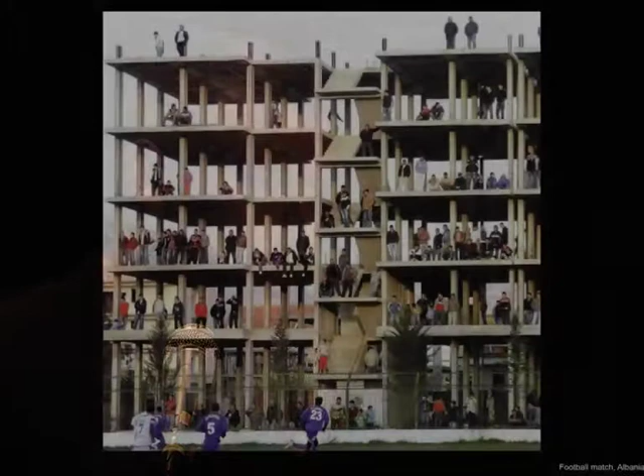Another misunderstanding, in a way, or misuse: a football field somewhere in Albania. And next to the football field there's a construction site, and all of a sudden it's used as a stand. Without any security issues. But all of a sudden, if you venture into this situation, you get the most fantastic view on the play. And we liked this image so much that it became the cover image of the book, the Double or Nothing book.

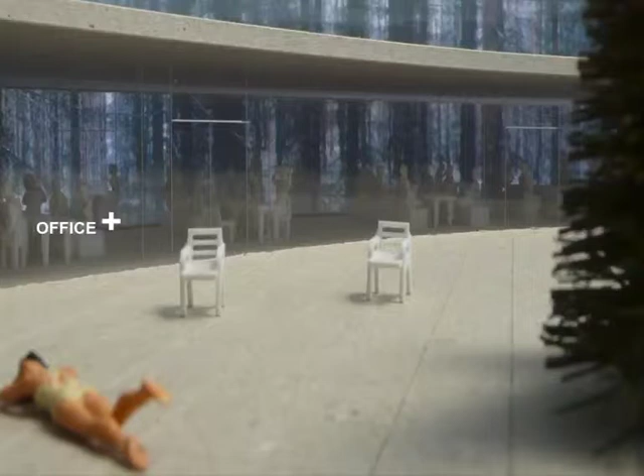So this Double or Nothing will be, of course, the theme of the lecture, but I'm not going to repeat each time what is now double or nothing. It's up to you also to decide or to figure out. But I'm going to try to show you some projects in a random order where this sensitivity or this interest is actually an underlying score.

First, we start with sustainability, because we have to talk about sustainability, so let's do it immediately, then we're in a way also rid of it. Office Plus is a study. No, I mean, I'm kidding, okay? The sustainability is important. Before I get there. Office Plus is a climate-sensitive office. So it's not a sustainable office, but it's a climate-sensitive office.

So there's a difference. This was a study which was granted to us about 4 years ago by the Rijksbouwmeester in Holland. And in Holland they use the GreenCalc method to calculate sustainability. The index starts at 100, and as it becomes more and more sustainable, 180 is the actual standard these days. So it's a bit like with a fridge. But the question of the Rijksbouwmeester was actually, what if we would reach 350, which is like 3.5 times the standard? So what if in 10 or 15 years' time we would like to try to reach 350? This is beyond passive, in a way.

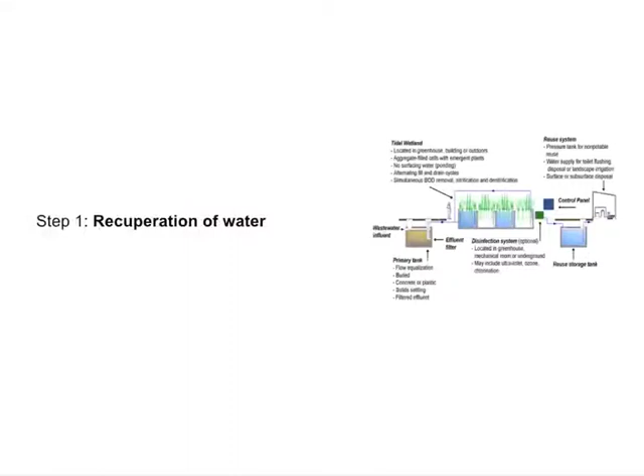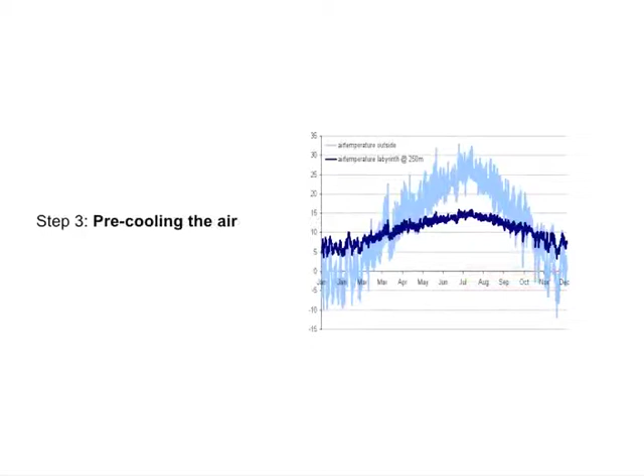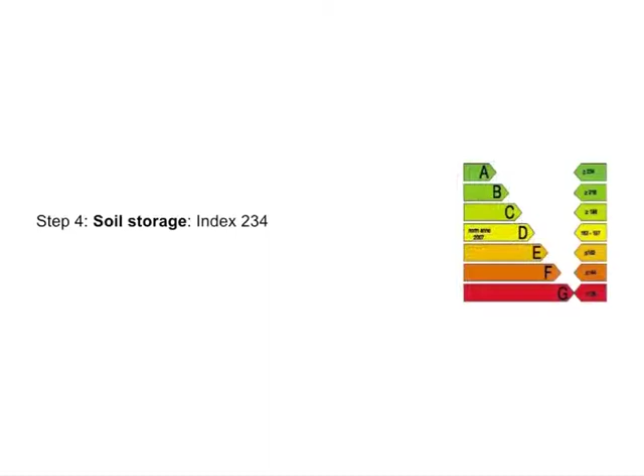So we start with 100. We do some recuperation of water, go to 120. Timber construction, go to 144. Pre-cooling of air, sending air through a labyrinth, 216. And soil storage, which gives us a 234 index. But still this 350 jump, in a way, we're not there yet. So all these technical methods, all these technical aids, they're not sufficient to reach this beyond standard.

And if we look at the office today, the standard office, and this is an office from the 50s, but it's in a way still the office today, you have a kind of constant temperature, 22 degrees, for instance. Although outside, the temperature changes. So we could imagine that also inside the condition changes according to the outside. This was the starting point.

A thermos, with multiple layers. And we devised an office building in layers, a bit like an onion peel. So the middle space is the clima-office, actually the usual office as we know it. It's insulated and conditioned. And then there is a space which is quite huge. It's insulated but not conditioned, because it feeds its energy from the surrounding ring. And then the outside ring, which we call the greenhouse, is not insulated, not conditioned.

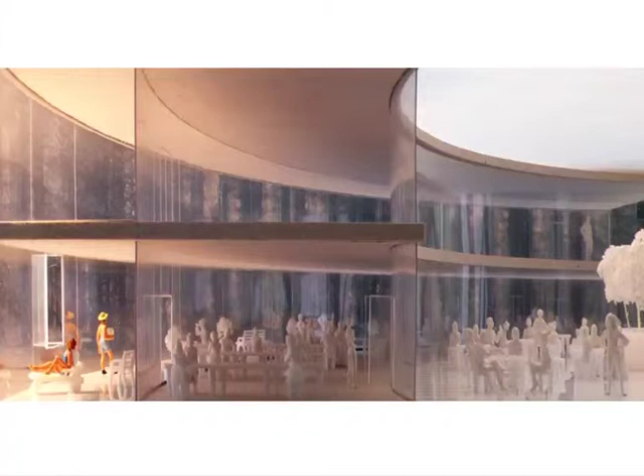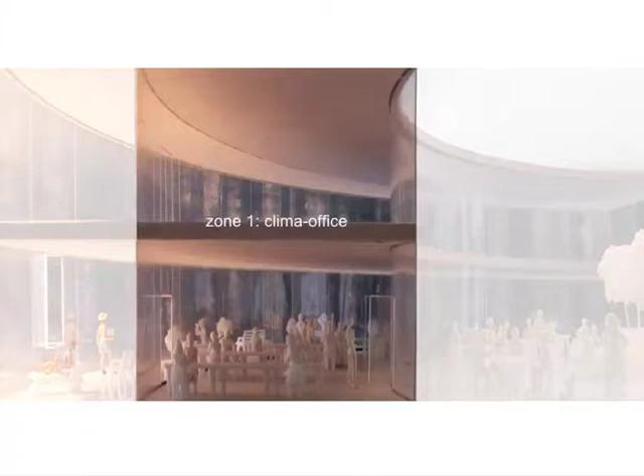And if we would cut through such a building, and at this stage in the testing it was circular, it doesn't have to be circular of course, we have this first middle zone, the clima-office, which is normal temperature, normal situation. Then the overflow space, the middle space. The overflow space is double high to compensate for the fact that it lies deeper, in order to attract more daylight, but also to be more spacious, to have more oxygen.

And of course the greenhouse, which is the thinnest layer but still inhabitable, is, like I said, non-conditioned and non-insulated. Which means that according to the figures 4 years ago, 1/3 of the surface is actively climatized, generating a climate-dependent building that can be fully utilized the whole year through, or well, 80% of the year, without any loss of comfort, which is a lot.

So that means that we still have to think about the 20%, which is not covered yet. So in a normal situation, everybody is everywhere. And at extreme temperatures, all of a sudden people group in this middle ring, which means that thinking about sustainability is really also thinking about, in a way, allowing for a certain level of discomfort, meaning that you have to change your habits.

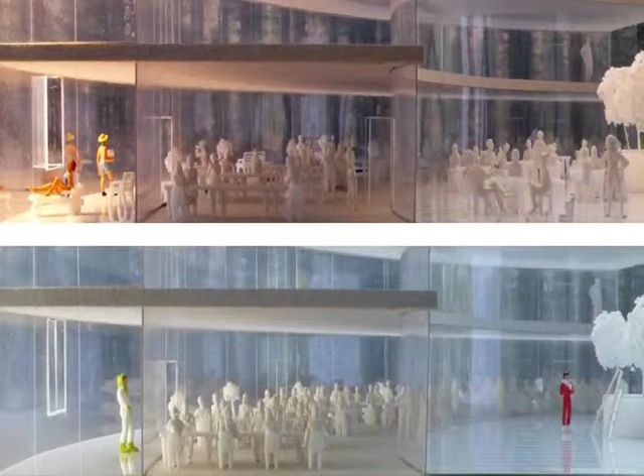So it's not a one-to-one relationship as what we know now, but if we really want to go sustainable, it means that during winter, for instance, this climate zone in the middle is densely populated. But it also can have its advantages. So summer, fully utilized; winter, kind of compressed office building. Which means that all of the time you have to negotiate your own position towards space, but also towards the people you work with.

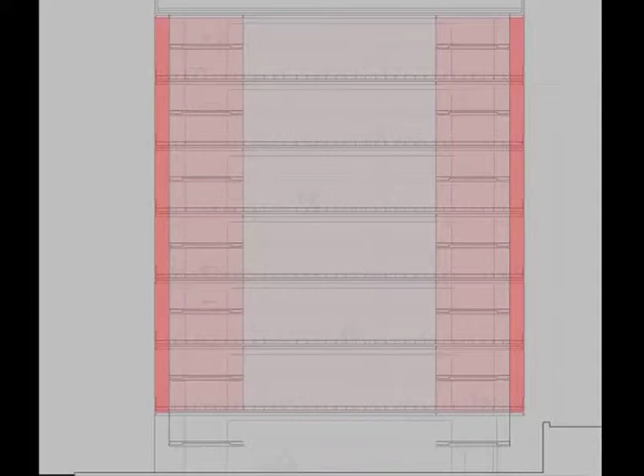At the moment it's a very abstract diagram, but it's the same principle. So the greenhouse, the climate office, and the overflow space. We're developing this concept for an office building somewhere in France, hoping that it can be built, because we really think that this is, in a way, the way to go ahead. So to create difference in spaces. As you can see here, the overflow space is double high. And the normal offices are, in a way, normal, but quite narrow, and the greenhouse as a kind of cover.

This is one possibility, of course, to think about sustainability. But like I said, it means changing your habits. It means being confronted with this tree that you actually have to negotiate. You have to think. And the same thing, in a way, goes for our office. This is the office in Molenbeek. Also, we're located in a spot in the city where we constantly have to think, we have to negotiate, we have to define our position. And the same thing goes for the people who work at the office. You see some people here trying to also negotiate their way through Brussels public space.

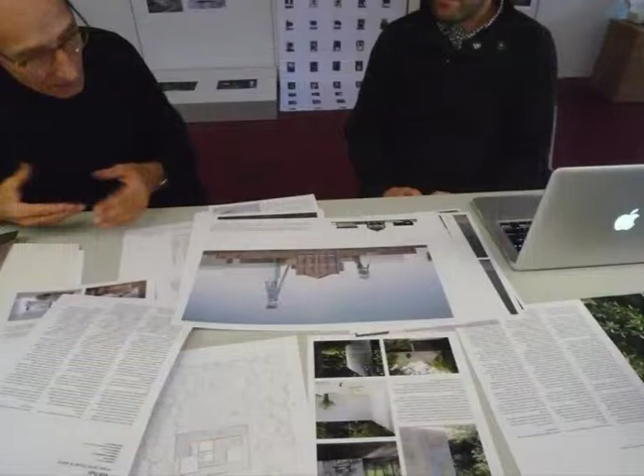And coming to the issue of exhibiting architecture, I think it's one of the most difficult things to do, and I'm pretty much sure that exhibiting architecture is impossible. So you have to find other ways. So maybe we're not exhibiting architecture upstairs, we're doing something else.

And during these talks, I remember the first time we presented to Dominique, I think like 50 projects, 5-0. And gradually, each time we had to prove or argue why a project would be sufficient enough or intelligent enough to make it into the exhibition. I think we ended up with 27 projects, 28 projects.

I like these pictures a lot. It's like, aha, yeah, this, and then still again doubting. And so we went on and on and on, but I think we made it, and I think the exhibition upstairs really is, for us anyway, a powerful tool to renegotiate our position towards what we're trying to do.

The place itself, although it's hot inside here, we're actually located in a fantastic building. It's Palais des Beaux-Arts, and for us it was the only place we actually wanted to exhibit in. And maybe this sounds arrogant, but it's true, because in Belgium anyway, I think it's the only place which is open enough, which is urban enough to allow for architectural exhibition in a proper,

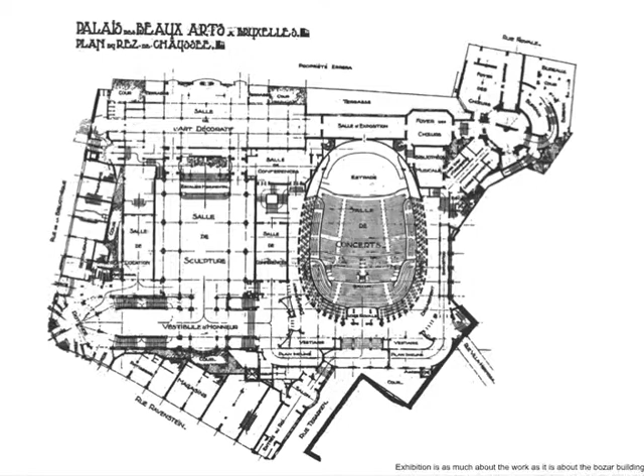And also when you see the plan by Horta, and I'm still doubting whether it's a genius plan or a non-genius plan, but I think it's a genius plan. I assume that it's a genius plan. This whole building, we actually wanted to make also a statement about being present in this building in Brussels with the work we're trying to do.

And you probably know how architecture is exhibited in the Palais des Beaux-Arts. And from the very first moment with Bozar, with Ivan, we entered into a kind of discussion to see what could be the best location to not present only the work, but also present the Palais des Beaux-Arts, or to represent the Palais des Beaux-Arts.

And we discarded the usual parcours, and we picked the Foyer des Choeurs and the salle de conseil. But we also picked one extra space on the other side of the Horta hall, in order to also be able to use the Horta hall as part of, well, not the exhibition, but what we wanted to state.

The Horta hall itself is a kind of impossible room with dimensions which are in a way larger than life. And again, this is a space where this suspension of disbelief could very well work, or should very well work. And these three spaces, this one is in a way a new space, it's part of the white box. These three spaces actually give on to the Horta hall, and they're designed now as cul-de-sac.

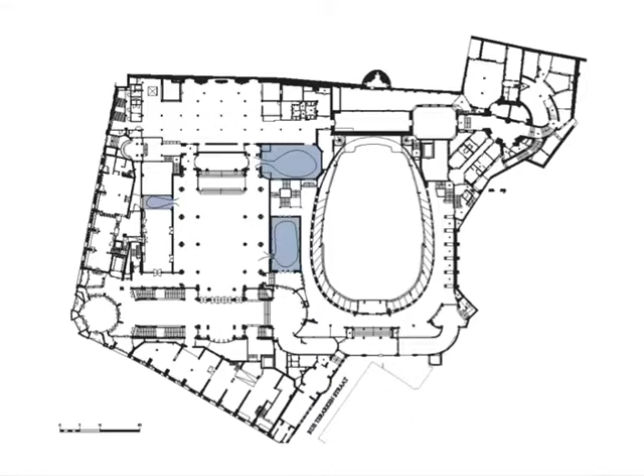So where you go in, you go out. So there is no way of, you always come back to the Horta hall. In the sense that this becomes then not only the central point of the building, but also the central point of the exhibition. And in a way it's maybe strange to do so, because if you see the plan, it's a very transparent plan.

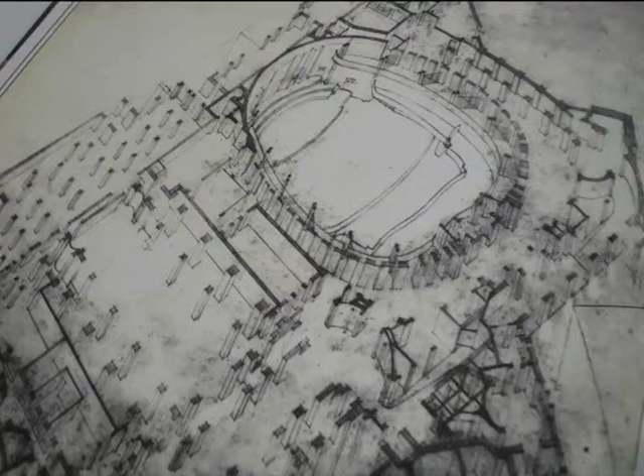In a way, what we're trying to do is to enhance the realization that you're actually in this kind of building. That it's not self-evident that you go from space to space, but that each time you come back and you look back, or you look for another space and you come back and you look back for another space.

This one, the Salle de Conseil, which you probably know, is again double high, but it's one of the most difficult spaces to exhibit in. And bearing in mind the title of Double or Nothing, we're going for a nothing now. We actually had a plan in mind, a concept in mind, because we wanted to open up the spaces. So this was an existing entrance, this is an existing but quite new entrance, and here there is no entrance, you have to go through here.

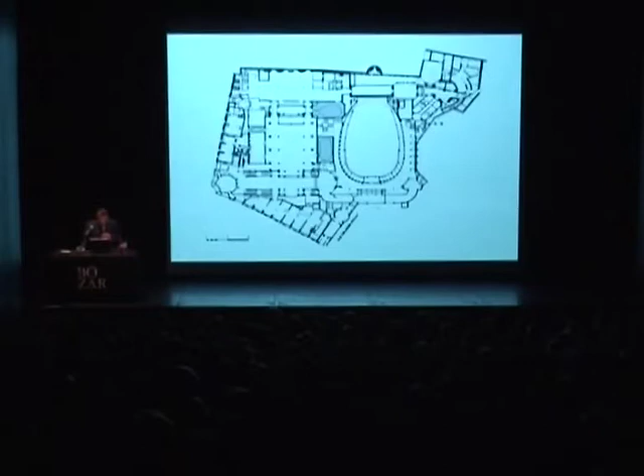And we actually talked to Beaux-Arts and said, actually, we want to use also part of the budget to maybe be part of the renovation. So the plinth is missing, so we will add a black marble plinth, but also a black marble door, which could give access to the Salle de Conseil in a very direct way. This didn't happen. We were so close, but Heritage said no. And we went back and they said no again. And then we said, okay, we don't have time anymore.

But maybe in the future, I know Paul Dujardin is a very big fan of the concept. So maybe in the future this will be realized, because we think it could be very worthwhile, because the Salle de Conseil is the only space around the Horta Hall which is not immediately accessible from the Horta Hall. So this was a nothing, but we tried to deal with the nothing, so the 3 spaces.

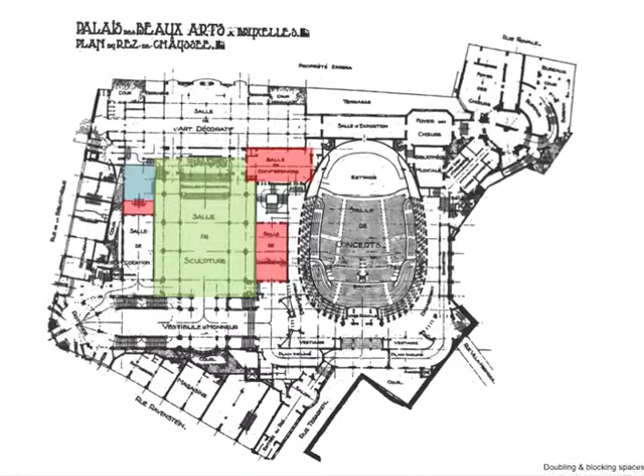But we were also interested in doubling the spaces or to block the spaces so that all of a sudden double readings could appear. And for instance, this small space, and I invite you later on to go into this small space, is actually also giving on to the Cinematheque. And this is the genius of this building. Everything is connected with everything. So in a way you go mad in this building because there is no order apparent. But it's fantastic to use it for the exhibition.

So this small space, in a way, is doubled, even tripled, by the fact that it's giving on to one of the foyers of the Cinematheque. So this is the first space, dealing with one project, one house, which I show later on. But again, in a way, almost showing the project in this space is almost secondary to the fact that this space is used in such a way, this kind of mirroring way.

The second space is the Horta Hall. So in a way, we're dealing with 4 mini exhibitions in one. And this was still a simulation when we thought opening was going to be there, but you have to discard this. In the Horta Hall, we're presenting 2 major works, also in a major way, on the scale of the Horta Hall, but not simply showing architecture, but trying to acknowledge the fact that, like I said earlier on, exhibiting architecture in a way is impossible. So how can you show this impossibility? How can you show the fact that, in a way, it's not real? Showing architecture is not real.

And we asked for these 2 projects. On the left, the tower, TID Tower in Tirana, Albania. On the right, C-Mine, Genk, refurbishment of an old industrial site into a cultural infrastructure. We asked Filip Dujardin to make these impossible representations of these 2 projects.

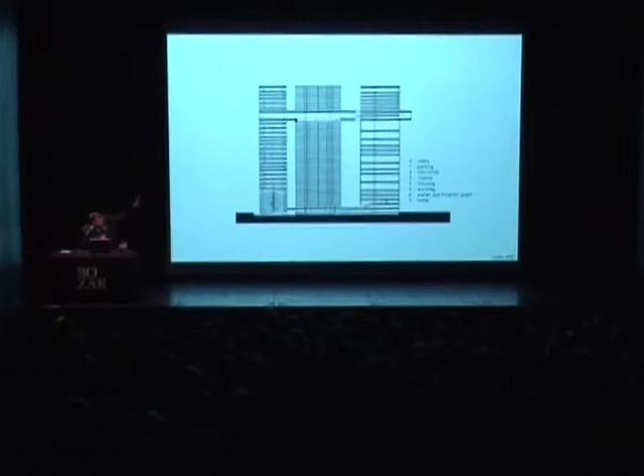And in a way, as a reaction to this, and also on the occasion of our first book back then, we developed this project. In a way, it's a flimsy project. It's a statement project. But it's about high-rise, and to think about high-rise in the sense that high-rise can also be something complex. Three high-rises connected with a new ground floor level at 150 meters high. On the right, a water purification center, because it was connected to the canal. It's actually standing in the canal. This is Quartier Nord, the canal.

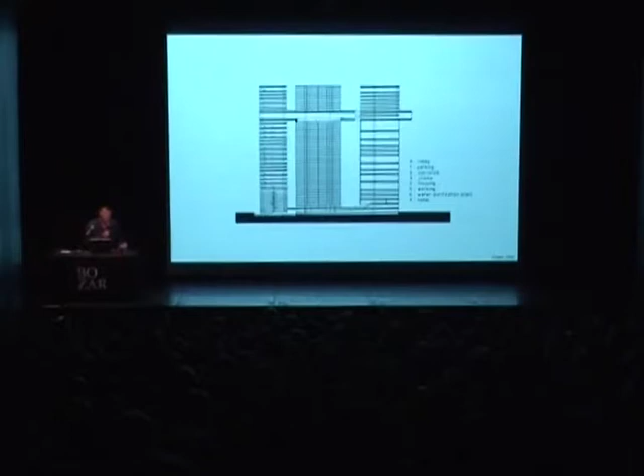Housing and offices, and on this level we thought it would be ideal for all the population services of Brussels. So each time there's a birth, each time there's a death, each time there's a marriage, you could have this kind of fantastic moment engaging with the city. And on top of this platform, you had a small skyscraper, Brussels size, which was a hotel.

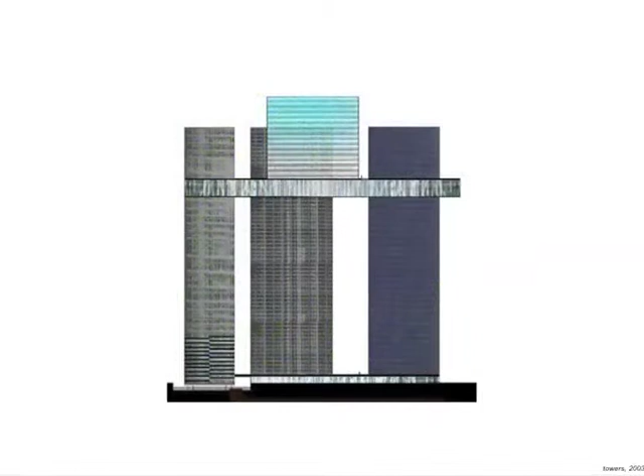I think 6 years later, we're facing this, more or less on the same spot. And let's say, although this is, like I said, a flimsy project, a statement project, not meant to be built, this is meant to be built, and we could imagine, if we think about the Sao Paulo image, where high-rise and low density together form a complexity of their own, that maybe here there are still some chances to be taken or to be developed.

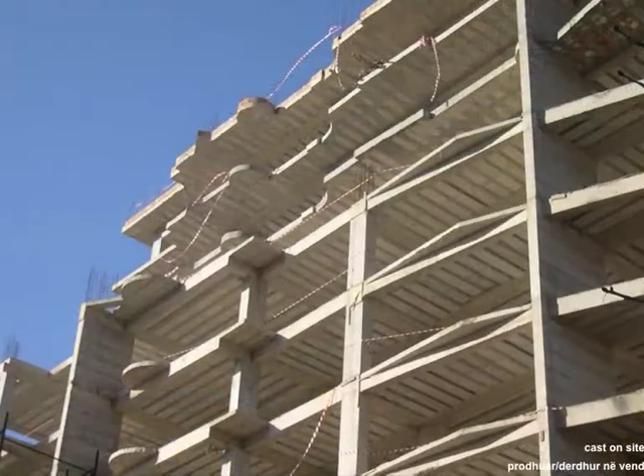And then swiftly going on to the tower we're making in Tirana, which is near completion. Tirana is this. It's a kind of big sprawl center. And all this is more or less illegally built. But Tirana at the same time has enormous qualities. It's very compact organization. It has beautiful climate, beautiful light because of the dust. There's a lot of dust in the air. Lots of Mercedes. But also low-tech building methods.

So we arrived in Tirana in a way by accident. But we were immediately confronted by the fact that what we thought we knew about building, it was worth nothing. So in a way we had to reprogram completely, 100%, and start from scratch, learn in a way how to build in Tirana, but also learn how to deal with the context.

And this is what I mentioned before, Rama, the mayor, who's been painting buildings, often illegal buildings. And it's a kind of very quick method of showing, and I mean, you can like this or you can dislike this, in a way it doesn't matter. It's not about beautiful or ugly.

But it's a very quick method of showing the people from Tirana, who come, let's say, from communism, pyramid games in the 90s, which made the whole economy collapse. So their sense of society is completely gone. And this, in a way, is a method, not the method, but a method to make them feel that they're actually part of a bigger whole, part of a society. So, and this is Rama, former artist, now mayor.

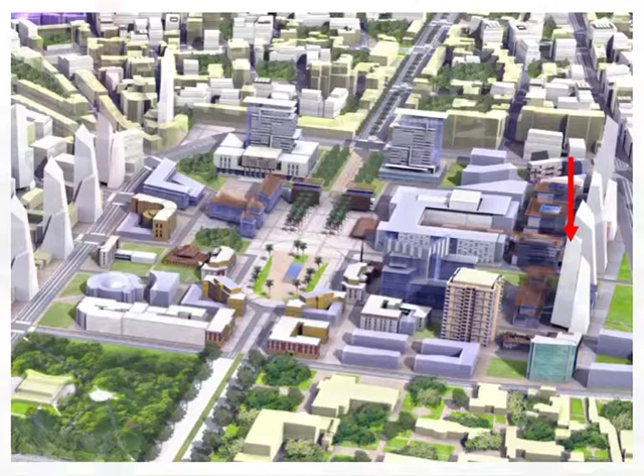And Rama has this crazy plan, to try to deal with the Tirana context in a contemporary way. This is an image of the center of Tirana, with old remnants of communism, amongst others. And the tower we're building at the moment is quite near to the center, so this is Skanderbeg Square. And it's part of a master plan. In a way, there were 10 towers planned, but they will never be built. We're dealing with this tower on this location.

On the location is the monument for the founder of the city of Tirana, Süleyman Pasha. And already there it starts, so the clash of scales, the impossibility of building something new against or next to something more than holy. And the tower project in itself, I'm not going to explain the whole project because it would take me too long. But in a way, it's not about the tower, it's not about the architecture, but it's about the light and how to capture the light.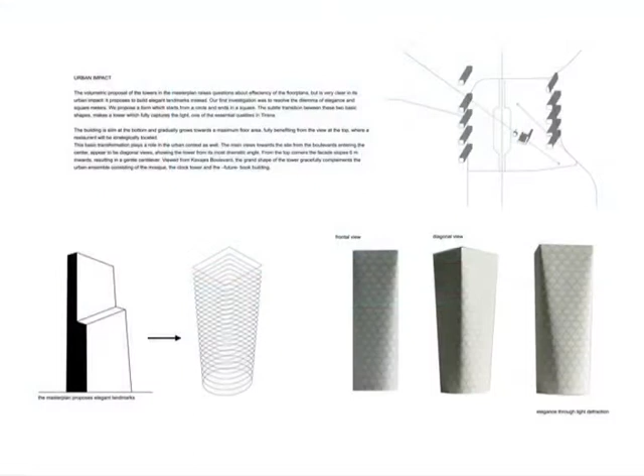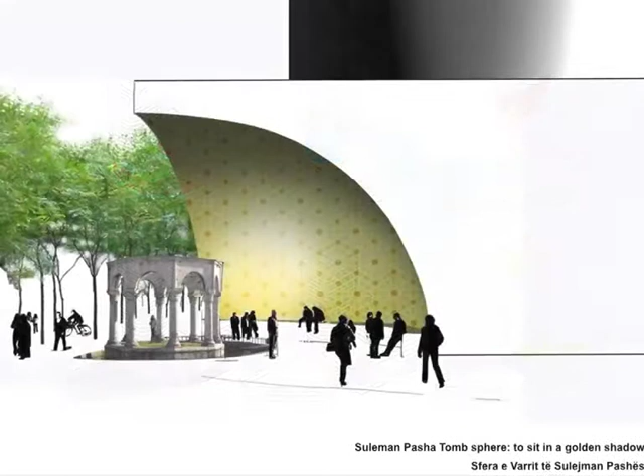And this is the first model we made. It goes from an ellipse to a rectangle. And this was what interested us, how the whole shape could capture the light. So superposition of all the floors. This is the lowest floor, upper floor. And you get this kind of vase-like volume, which is programmed with different functions, from commercial to housing, or it could be housing, it will be offices and some public functions. This is how we try to deal with the Süleyman Pasha impasse.

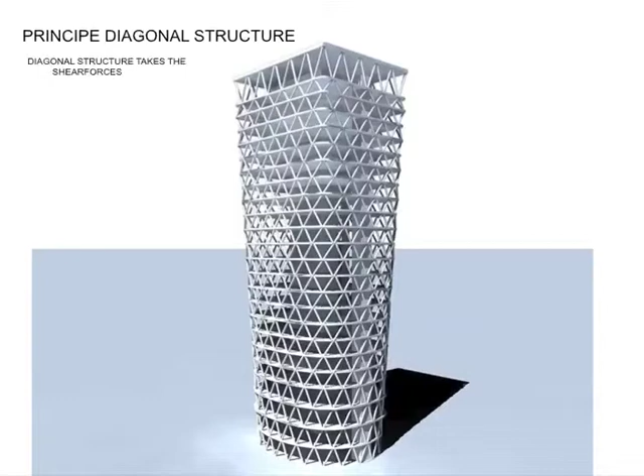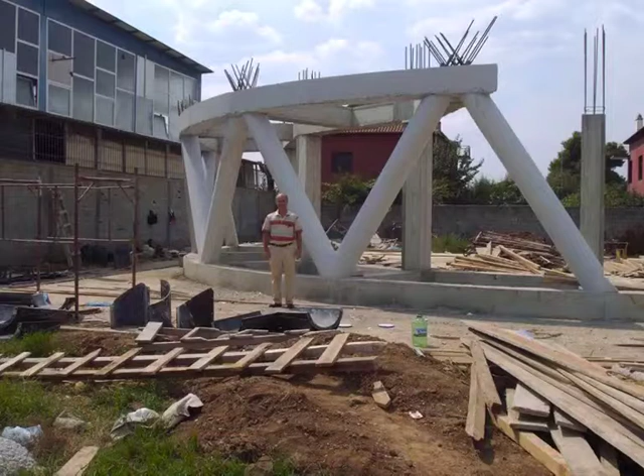And this was during the competition, because it was a competition, this was the proposal we made. We thought we had to be very inventive. So we made up some kind of structure because it's earthquake territory. We also made up this kind of skin, kind of moucharabia skin. And we were, in a way, making the project very, very complex without knowing it. Because, again, we didn't know the context of Tirana yet.

After winning the competition, we got an engineer and also a client who was completely convinced about the whole structure. So he said, well, let's build it. Let's make a mock-up to actually show that they could build it. But you have to know that each of these beams have different lengths, the whole tower through. So in a way, it could be built, but it would cost so much money. It wouldn't be clever to do so.

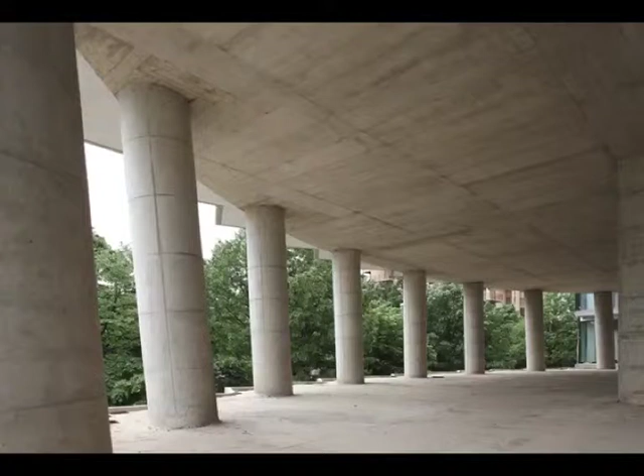So we managed to convince the client of going for a more normal way of building, inclined columns. And also trying to reconsider what we proposed during the competition, to reconsider the skin, also make the skin, let's say, as stupid as possible, so that it could be built with low-tech means.

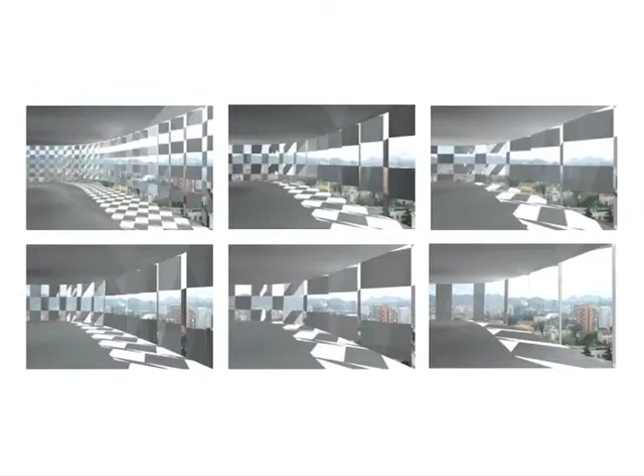So we tested one-to-one different variations, because the one thing we knew was that we wanted to go for a ratio of 50-50, so 50 open, 50 closed, because it's Mediterranean climate. Also, what you have to know is that it's extremely dirty. There's a lot of dust, so you can't make a glass building over there. So it should be a building which can get dirty.

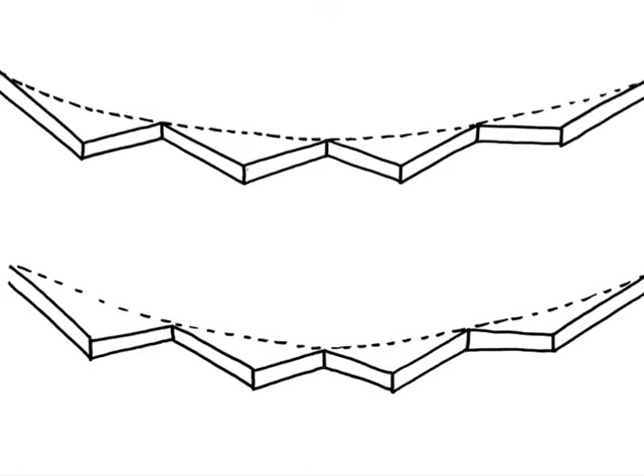And I'm now making a shortcut of 2 or 3 years, we arrived at this principle where each floor is actually surrounded by 44 triangles, and the inclination of these triangles shifts as you go along. So at the bottom it's very sharp, and as you go along they become more and more flat, which means that with one panel, one size, we can clad the whole tower in such a way.

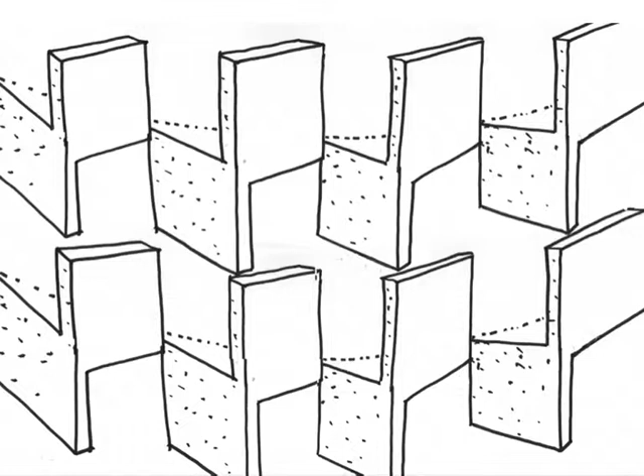And let's say the astuce is this, the fact that they don't touch, because this super ellipse shape is completely three-dimensional. So if you would think of the Gherkin, for instance, in London, we didn't have these kinds of budgets to cover the facade in such a way, so we had to find ways, making use of the fact that the eye, in a way, is lazy and reads this as a kind of continuous skin. But at the same time, it was also about dealing with the scale of the city and dealing with the scale of the building.

So using these panels, which are quite high, they could be sensed as very high balconies. It's a bit, again, like with the tree, so it's in a way too big to be normal. But it opens up the view. By blocking it, it opens up the view. So it engages you with the landscape. And again, we still have this potential of filtering the light, capturing the light, making mock-ups. They like making mock-ups.

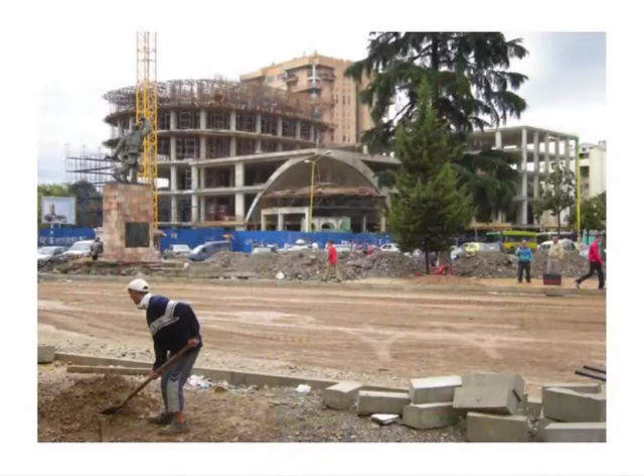And also this is a very important image, because, like I said, you have to forget everything you think you know. This building, for instance, is the first building in Albania where there are construction site meetings. It's the first building where we comply with international standards. But that means also renegotiating your ways of dealing with the construction site. So Johan Anrys, the partner who is almost always on site, devised a system where he projects on a whiteboard, because the contractors can't fully read the plans. So we have a problem: they have to execute the plans, but are not really able.

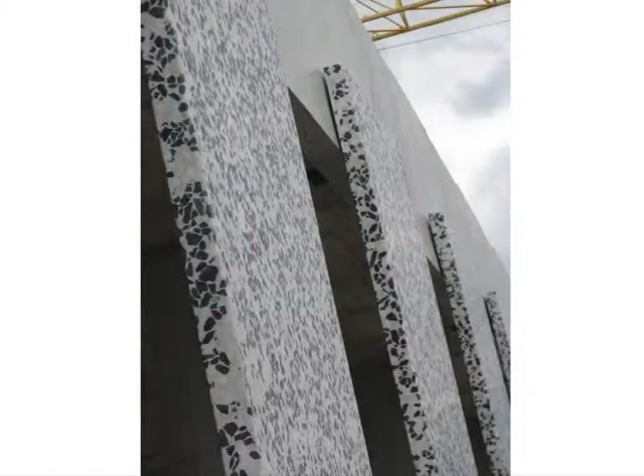So we draw at the same time with the contractors on this plan, and by drawing, we actually also know that they understand, and we are quite sure that we can go ahead, even though it's still a very low-tech way of building, but one that they can manage.

So this whole building, in a way, is about filtering views, filtering light, and again, being present in the city, but also giving a very clear signal to the city that in a way it's like painting the facades, but it's a three-dimensional way of giving the same kind of signal. As you can see here on this picture, this issue of scale, I think it works quite well. So it's not too big, and at the same time it challenges the scale the city has today.

Also, it's not only a tower, of course, it's a kind of a base, and the way it stands on the ground floor with a small galleria, it becomes a small part of the city, ready to be enlarged, ready to be continued. And this is the view from Skanderbeg Square, where you can see Skanderbeg, the clock tower, the mosque, and the TID tower. And although they're from different times, almost from different beliefs, in some strange way they start to make up a comprehensive whole, a comprehensive way of dealing with the city.

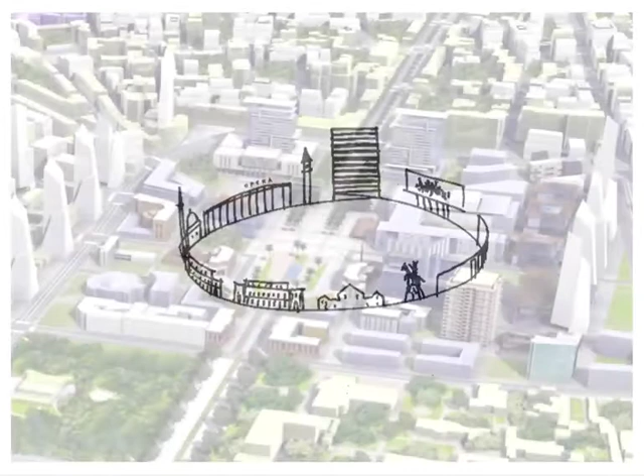This is Tirana. So the idea is actually in this sprawl to make, almost top-down in a way, a space, an oxygenous space from this. But also a space which can actually deal with the fact that around this current square there are buildings, there are monuments which are in a way a kind of testimony of Tirana's culture, of its history, and it's not always pretty, it's not always beautiful, but nevertheless making a space which could deal with this.

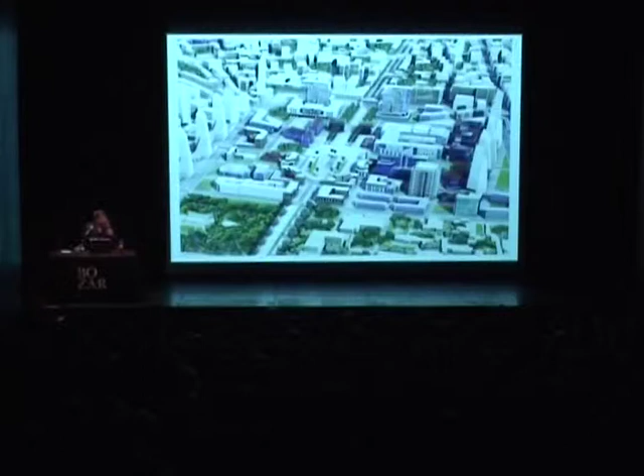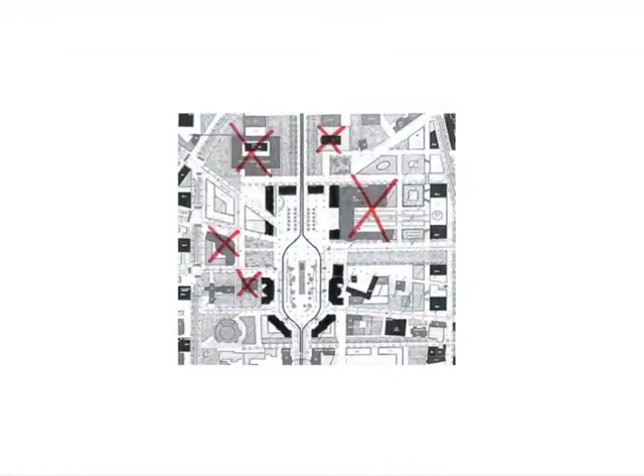The former master plan, which was developed by Architecture Studio, actually foresaw a new square by building new small buildings. So in a way, eradicating all these communist buildings, hiding them. And we wanted to do, in a way, the complete opposite. So making a square where every piece of history was actually on the square. So there was no way of escaping.

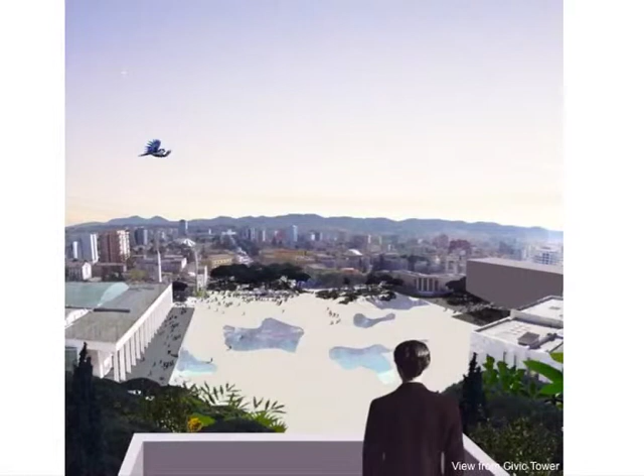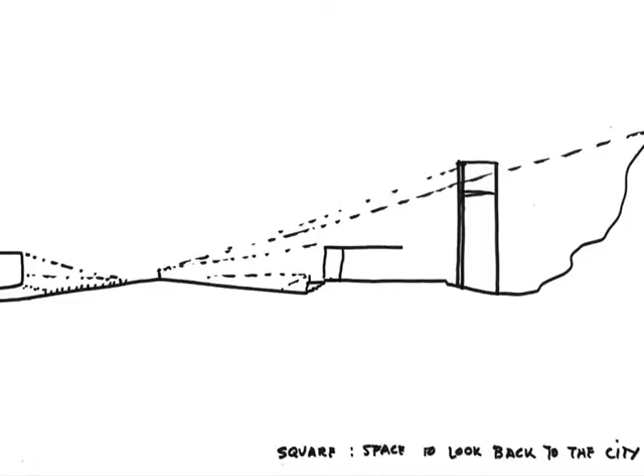The square itself is a slight pyramid. Slight pyramid, not for the sake of a pyramid, but in order to, in a way, break the square. But also, all these huge monuments have these kind of stairs. So all of a sudden, people in the middle of the square are looking above these pedestals. These pedestals, which back then were actually meant to frighten people to actually enter the building. Around the square, there will be also kind of a green ring buffering the square.

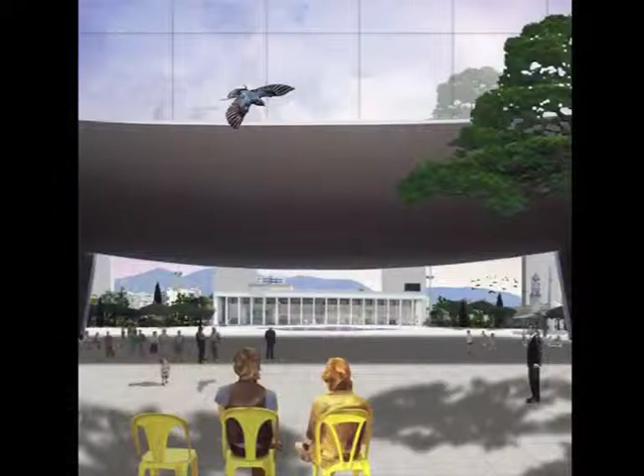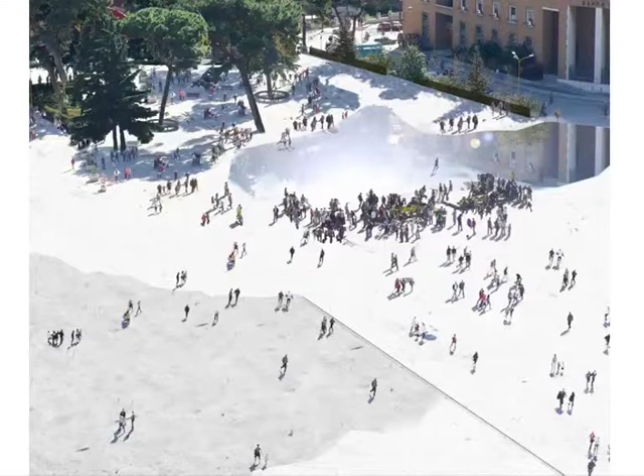And also on the square, and this is not for the sake of happiness, there will be water features. Water features, of course, in order to install on the square moments of doubt, moments of interference, where all of a sudden water starts to arise. So you have to, again, each time renegotiate your position. This is the underground of the square with all the tubes for the water.

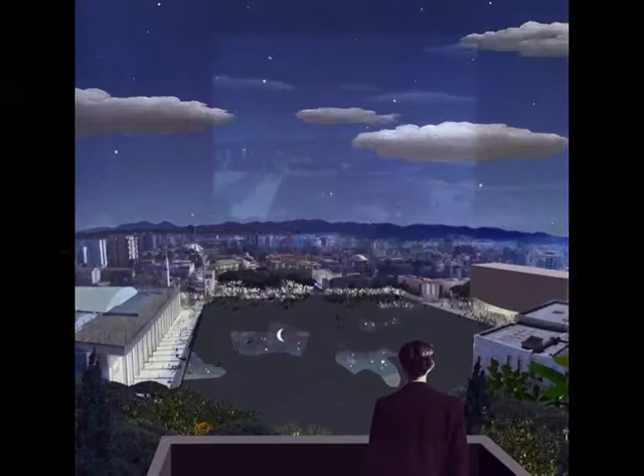And this is a simulation of the water at its highest speed. Because again, the water is of course for leisure, but also for cleaning. So it has to be quite powerful. So these were tests in a laboratory in order to see what kind of speed should be reached.

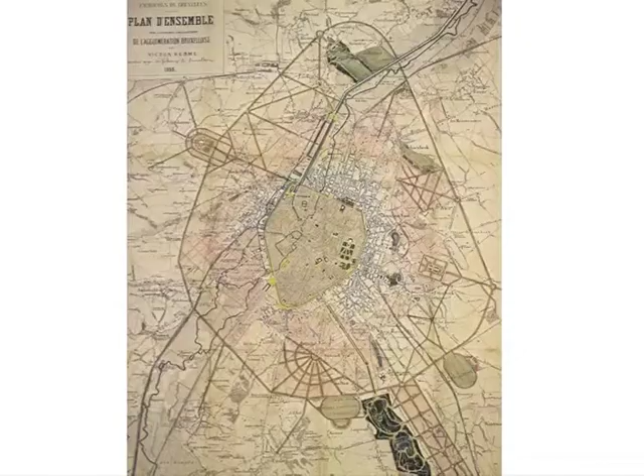Brussels also, in a way, is a city which has difficulty in engaging with this public space. Leopold II, king urbanist, who actually managed, of course with the wrong money, to make spaces of a certain scale. This is 1866, the Besme plan, with a ring where all these rich, very generous park infrastructures were built in a very short time. Can you see this? Yeah. So this is Leopold II, his intervention.

So he has actually installed a scale on the city of Brussels, which still, until this day, defines the city of Brussels, and at the same time, on a political level, I think, also proves that we're not really capable of dealing with this scale in Brussels. And also, what is quite striking is there is a part missing. So the left part, Anderlecht, Molenbeek, is missing. You can also see it in the city fabric.

It's quite dense. And on the contrary, it's a site where the abattoir is, where there's a big dénivelé, which has a lot of potential. And again, same thing as with the tower project. This is a project without a client, in a way. But at the moment, we're working on the study for Brussels 2040, so we decided to filter it into the study, although the study will be much richer and much more encompassing.

But studying the plan, all of a sudden we saw this space, this, which is cut by the canal. This is the abattoir.

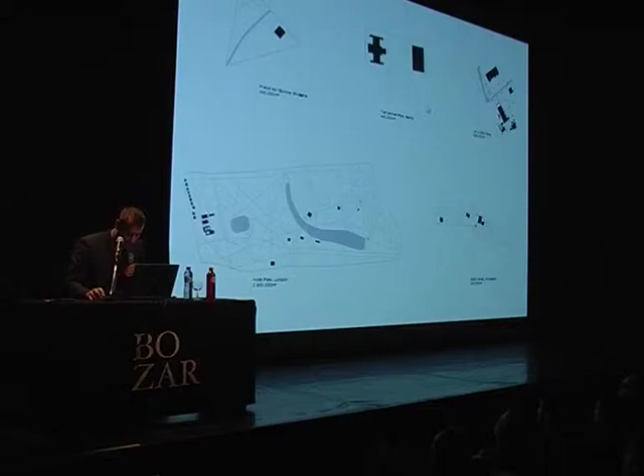And also could be compared to the Ibirapuera Park in Sao Paulo, although there it's much bigger, of course. But all of a sudden, this ring of parks could be completed with a new park, and this is an ongoing project, so I'm showing you work in progress.

We don't know if it's a park, if it's public space of a different order, but we like this logic a lot. I think also for politicians, I think this could be one of the answers of dealing with public space in Brussels.

I don't have 5 minutes of intelligence, so I have to... Should I present it or should I skip? Because, huh? Present? Okay, quick, 5 minutes.

5 minutes of intelligence. Also, that is something that arose only the last 3-4 years at the office. Of course, everybody has 5 minutes of intelligence now or then, but maybe it was as striking in the office that all of a sudden we... and we can't program this method of working, but it occurs every now and then. And I'll show you 3 small projects.

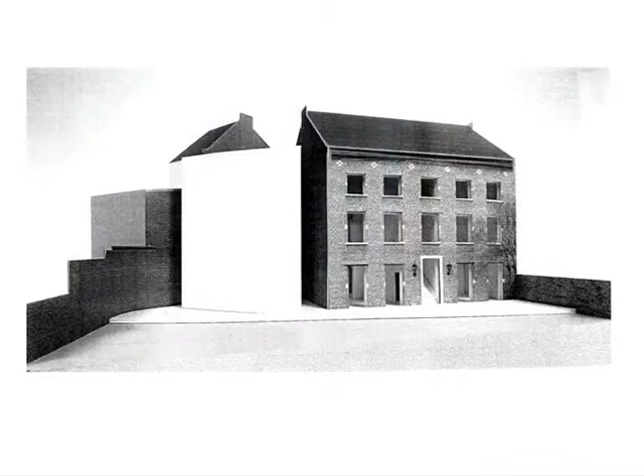Something which is under construction right now. It's in a Flemish provincial city. Street, corner, this is the house, this is the garden. And they have a triangular site, which is bordered by 2 walls, 2 blind walls. And we thought at the beginning that we had the answer, and quite soon there was this kind of triangular small tower, slightly shifted into this vacant lot, with the blind facade towards the garden, but very big openings towards the adjacent walls. So in order to have light filtered in.

And also, of course, on top, to make a kind of skylight which would be self-explanatory. And searching for these dimensions which are almost too narrow. But the clients didn't like it. And then this all of a sudden arose. So somebody at the office took a paper, an A4 paper, and just shoved it in. And hey presto, we had a project.

So, and you can also see it at the exhibition. It's A4, up, you apply it, and it fits in exactly. It's the right size for the pavilion. It's also, all of a sudden, the right way to look through the garden, kind of arch. And the third project, 5 minutes of intelligence, is again in Tirana,

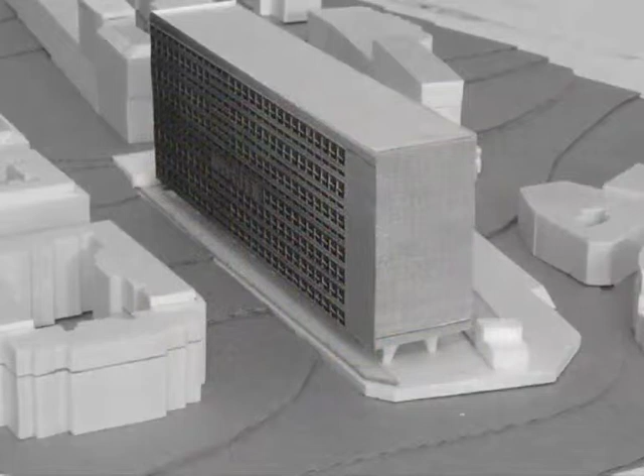It was a competition for 350 dwellings in Paris 16e, so a very posh neighborhood, very luxurious, next to the running track, and quite in the center of Paris, of course. And the question for 350 dwellings equals, of course, unité d'habitation. This is, I can't remember, I think it's 7 floors. So this was actually what they were asking for, this kind of imposing on the context. Of course, this was made impossible by tons of rules.

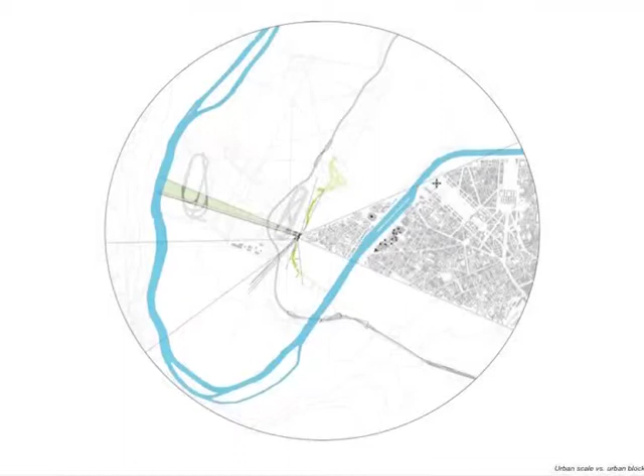But there were 2 things we decided quite immediately. A, the original question was to divide these 350 dwellings into 4 buildings to make it more natural in the city, so each architect could do 1 building. We decided to venture into the option that the 4 offices would make 1 building together. The second thing we decided was that the building itself should be more than just a building. It should relate to the city, the wider city of Paris.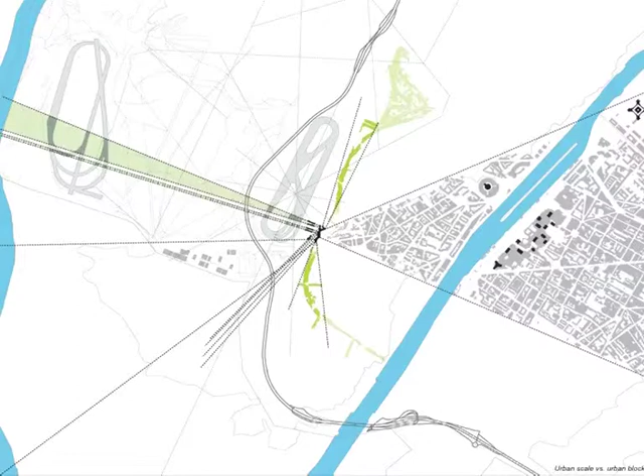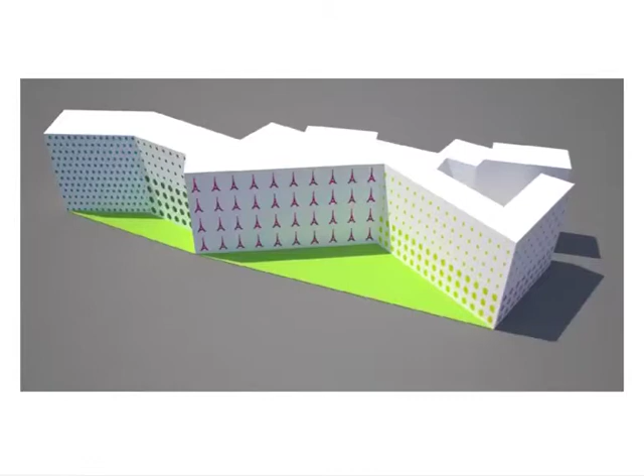So as we zoom in, you see these lines, which are viewing lines. This is the building, the end result of a series of context relationships that we're trying to synthesize into 1 project, into 1 object. So each apartment had good views. Each apartment had outside space. Each apartment had the maximum, of course not 100%, but the maximum light condition. Which means that it's negotiating between city block compactness and unité d'habitation compactness, but it becomes a typology of its own, maybe a new Parisian typology.

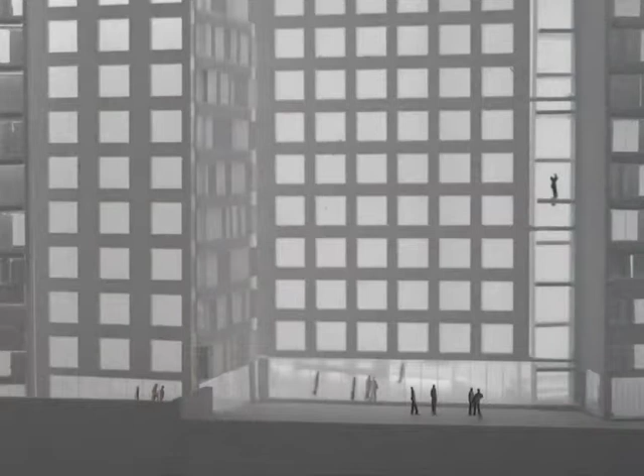And what was even more interesting was that the splitting into 4 buildings also complied with 50% private housing and 50% social housing. And also there we decided to put them into one building. And these were all decisions which were taken without being asked to do so. We ended second. This was, of course, one of the reasons. But nevertheless, we think it was an extremely interesting experience, also to work with 4 architects on one building. 1 architect left, for instance.

It happens. And also the result is a building which is composed out of sub-buildings, but nevertheless is still, in its functioning and in its public character, the open space, the shared space, all grouped in this building, so there are no individual territories.

Making a small bridge to Brussels again, but probably this is a project you know. It's a café on the Rue de la Loi. Refurbishing, small budget. But if it's about le programme bis, or the double or nothing, this is one of the projects where it's put to its maximum. This is a question posed by a political party, CD&V, and they wanted an open house. And often political parties, when they ask for an open house, they want a big window where they can put their logo, and that is then the open house.

Quite soon in the process, actually the first meeting, we said that we didn't want to do this. The only way we could proceed was if they allowed us to re-question the question, which they allowed us to. And after some thinking, we proposed to them to make a space, the ground floor space, to give it to the public, to make it into a public space. Small cafe, 35 people. And the entrance for the CD&V is here, so it's really on the side.

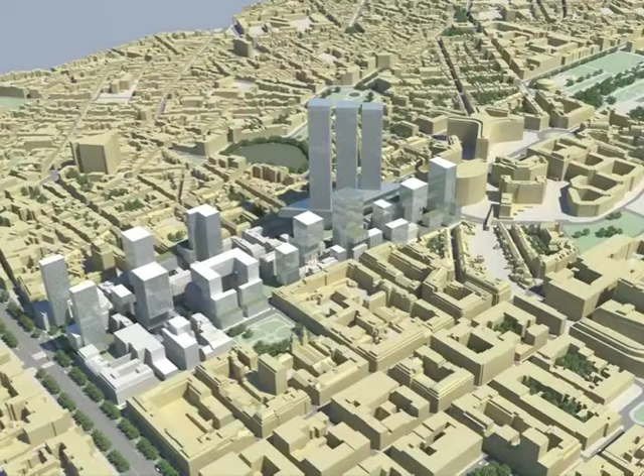And a couple of years later, this plan was proposed for the Rue de la Loi. And the scale of it, I think we're somewhere here. So anyway, this building will get demolished 10 years from now. This we know for sure. But for us it's a question whether this is the right way of trying to deal with the way Brussels should go ahead.

We think that if each office which would come into this neighborhood would offer this kind of space, maybe the whole quartier could start to live again. And the double or nothing issue, as I said at the beginning, is not double or nothing scale-wise, okay?

The double or nothing is also, if the client is willing to venture into something where he doesn't know the end result per se, only a bit, then it works out quite well, we think. And even more so for a political party taking up its role. And rest assured, we are neutral. But the fact that they took up their role very seriously makes the project possible. And this is the last project, just so you know.

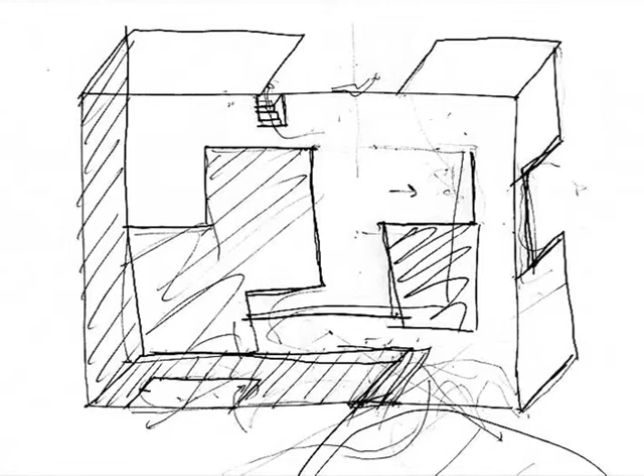So we proposed something quite radical, two operations. This is the house, the footprint of the house. The first thing we proposed was to wall the house, so to enclose it completely. And the second thing was to gut the house, so to empty it completely, or the center of it. Which means that we arrive at a certain kind of sequential order.

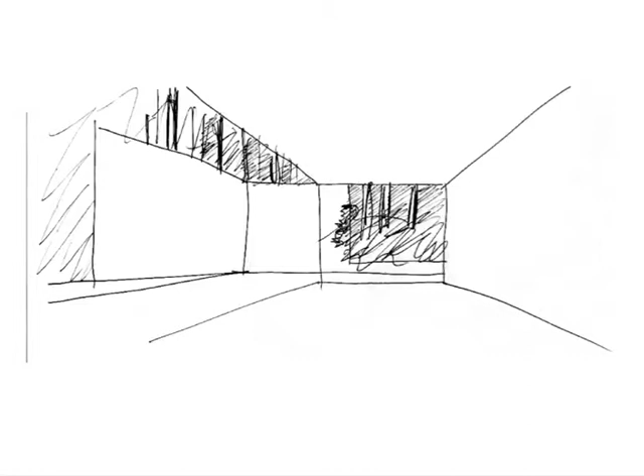So we're now inside. There's a new space which arises. This is more or less a 3-meter offset from the existing house, and a 3-meter high wall made out of steel, 12 millimeter steel.

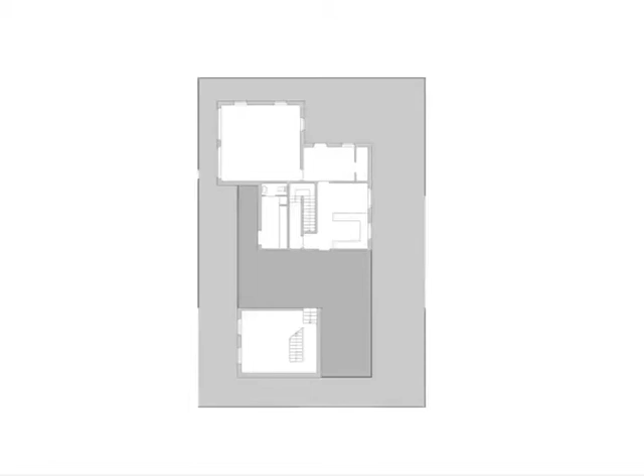So the original plan of the house with this gutting and walling, with the idea not to enclose the house but actually to open it up to the fact that it was positioned in a forest, the fact that it was quite dark, trying to catch the light through these walls, reflecting light inside. And this is the wall, so during winter.

This is where you enter. So there is no front door. You have to enter through a slit of 60 centimeters through the steel wall. And then you enter into this space, and then again, there is no front door. You have to enter through this door, which slides open, but there is no key. So,

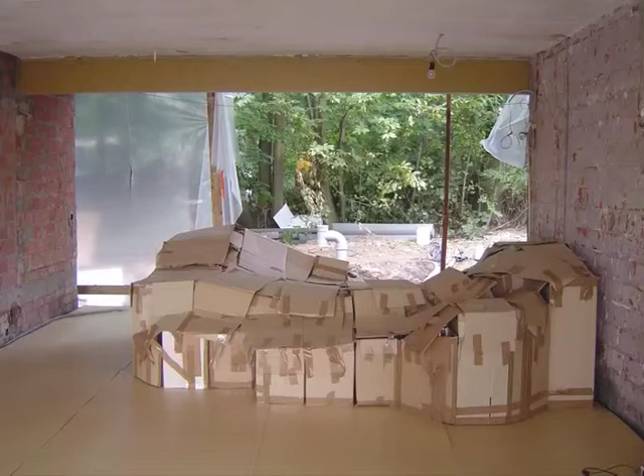And even although it was still cardboard, already the tactility of this object was present. So cardboard becoming tactile. We put the object in the space. It's a 3 by 3 meter surface. And then we started thinking, well, what is it? I mean, how can we actually make it that it makes sense?

So we were thinking about binding something soft with cloth, kind of piling up mattresses, very beautiful models in a way, but again, what is it? We don't know. Going to a one-to-one scale model, very confronting, and asking the clients to use it, even more confronting, because you can't use it. But gradually we were filtering and making this thing a reality, thinking about fabric, thicknesses, combinations, sequences.

And this was, in a way, the first model where we're still not convinced, of course. This was still a very doubtful moment. But the scale of it in the space made sense. And although the client was also doubtful, we accepted the fact that they were going to use it for a couple of months, invite people, sit on it, lie on it, do things on it. And let's say trial and error methods to show how it works.

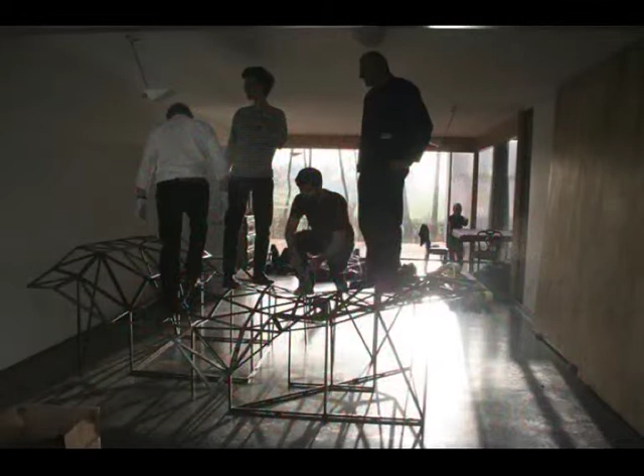And there we encountered Atelier Chevalier Masson, who are geniuses in fabric, and in that sense helped us also enormously to get grip with this, in a way, small monster. So we developed a steel structure, also there checking whether it's strong enough. And then Chevalier Masson started weaving, making this soft surface with tubes, soft tubes, covered in textile.

Making this kind of woven, enlarged textile. So again, the scale clash is there 100%. This is almost like zooming in on a piece of fabric. And yeah, this is it. I mean, it worked quite well. And it still works quite well.

And once this was finished, I remember saying to the client, and maybe I was wrong, but I said, well, now the house doesn't belong to you anymore. In a way, it has become kind of a guest house. So you should invite guests. And you also become guests in your own house. And they acknowledged this fact quite well, and they work quite well as guests in their own house.

But we developed together a kind of program where we actually invite guests. So the owners leave, they are abroad or somewhere else for a day, 2 weeks, maybe half an hour. And the guests are given carte blanche. And the only thing which is asked is: react to the environment you find yourself in. And the first guest was Enrique Marti, who made 2 dolls, the 2 dolls you saw at the beginning of this project. So he cast the client.